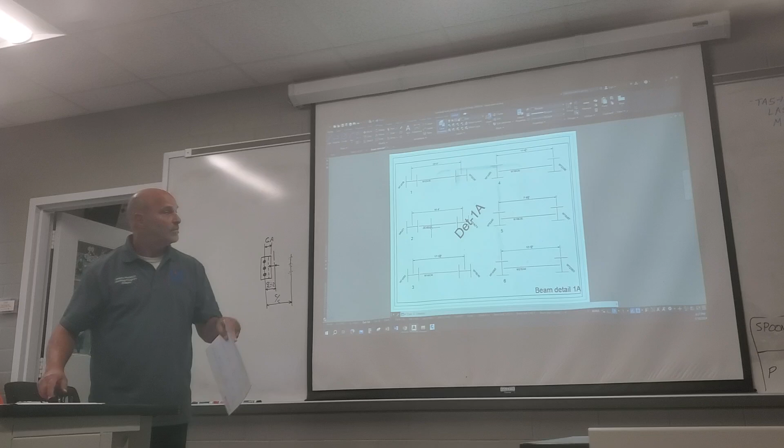I've shown you both ends of that beam. So on the previous assignment, we were just focused in on one end. All we could see and were worried about was that one beam and that one column right there. Now I'm showing you both ends. So this is what would be handed out to you as a drafter. This is what we would receive.

It's already gone through the design stage, where the facility says this is what we want for this kind of a unit. So different companies came in, they started engineering all the piping, all the other vessels and everything that needed to be out there. And they said, all right, civil structural people, we want all this off the ground. How can we make that work?

So then the civil structural designers went through and said, well, we've got this span right here. We need to support this. We'll put a column there. We'll put a pipe rack. We've got all this pipe coming from this location all the way over to here. We need to run all that pipe over there. Let's do a pipe rack. Sometimes it's, let's do a T-support, kind of like what we see outside these doors.

Does anybody take Highway 69 to Nederland, by the airport? That facility that's going up between Twin City Highway and 69, most areas are still in the civil structural phase. When you ride by and see all those square pillars, those aren't 4x4s. At a minimum, they're probably 16, 18-inch squares. Those are the pilings they're pushing down to get that compression, get that strength under whatever's gonna be out there. Sometimes it's vessels, but it's the civil structural that does that.

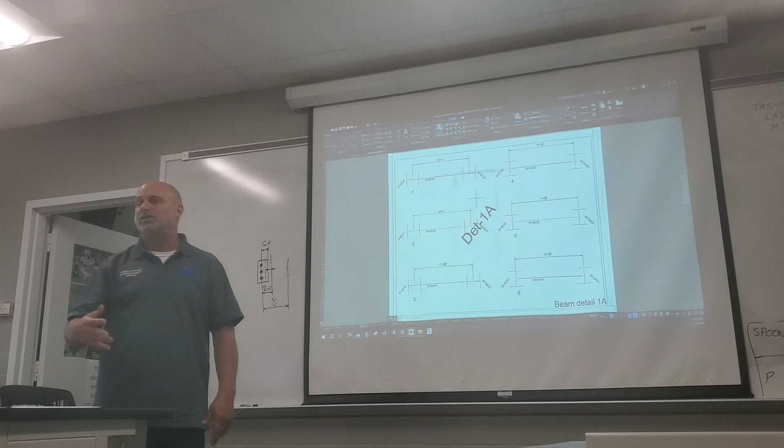So right now, they're mainly focusing on the below ground stuff. I don't go by there that much. Every few weeks or so, I'll ride by and notice a few changes. But I was going by there fairly frequently during the long semester, and I was noticing pretty regularly they were out there pushing those pilings down. I've seen them do stuff like that out at DD6. But that's all still civil structural.

Remember, civil structural starts at the top of the concrete and goes down. Anything steel above that concrete is still civil structural. All the rebar, all the footings underneath, that's all civil structural. All the beams and columns you're gonna see start going up pretty soon. Those areas with all those little squares look like somebody took a handful of square toothpicks and threw them in the ground. Those are gonna have something up there. They're supporting something. At some point, they're gonna start pouring slabs out there.

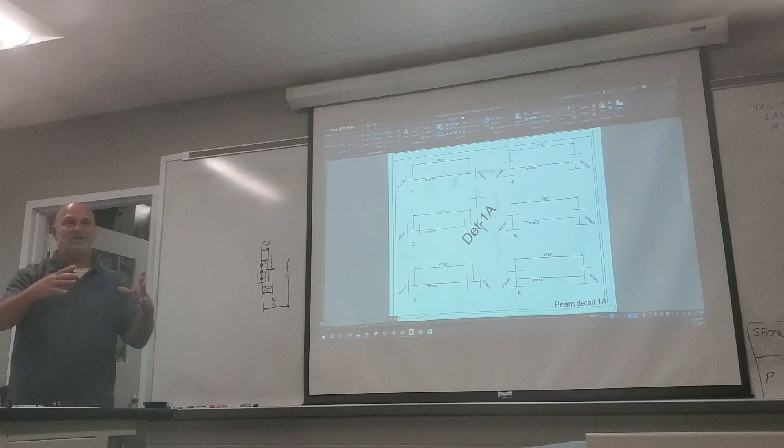As they pour slabs, you're gonna start seeing something similar to the footings you see in parking lots with light poles, those concrete piers that stick up. If you're riding by and see some of those sticking up close to the highway, don't get in a wreck. Take the feeder and stop over there. Don't pick up any hitchhikers in that area, remember?

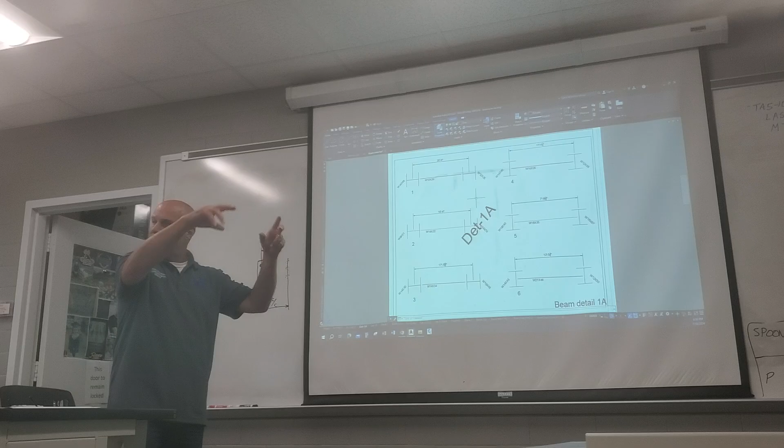You're gonna see anchor bolts sticking up out of a bunch of those. In the future, you might see a bunch of those little piers sticking up out of the ground with anchor bolts, usually 4. Then the next thing you'll see is all these columns set on there. Then the beams start to hang between them, the bracing starts to go between them. That's all the structural part once it gets up. So that's what it is.

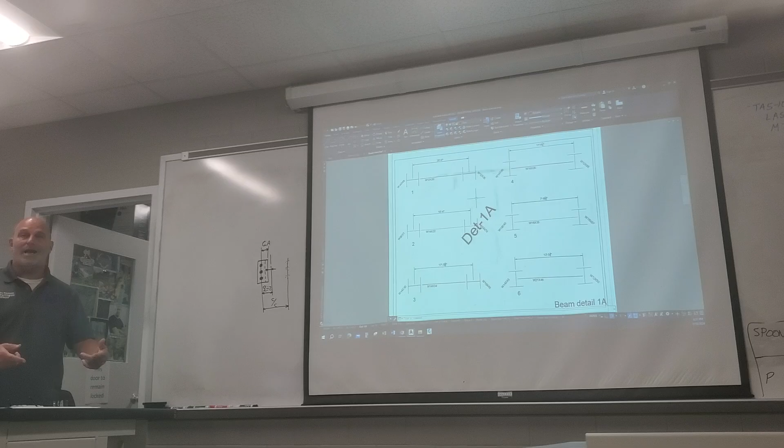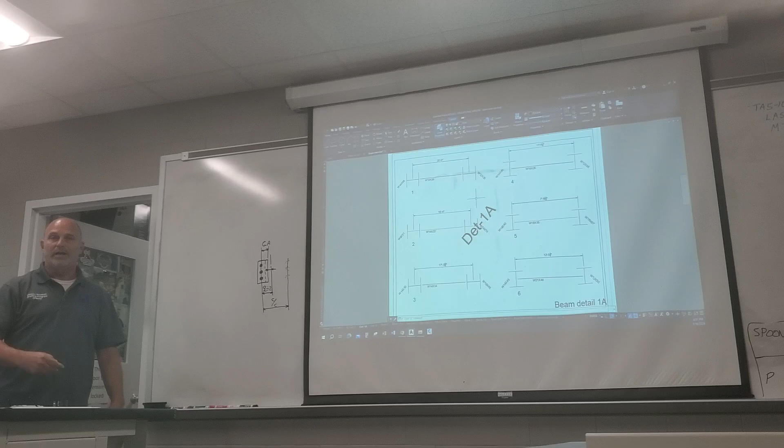Remember, this has to be 100% accurate before it gets out there. Not that place over there; they can probably drop it down on the ground and make changes because there's no actual facility, no unit, no processing being done out there yet, so there's no flammable gases. But on a normal basis as a structural drafter, you're working off this erection drawing saying we're gonna build this. I need to tell them what they need to build that. We need a column this size, this tall, with holes at this location.

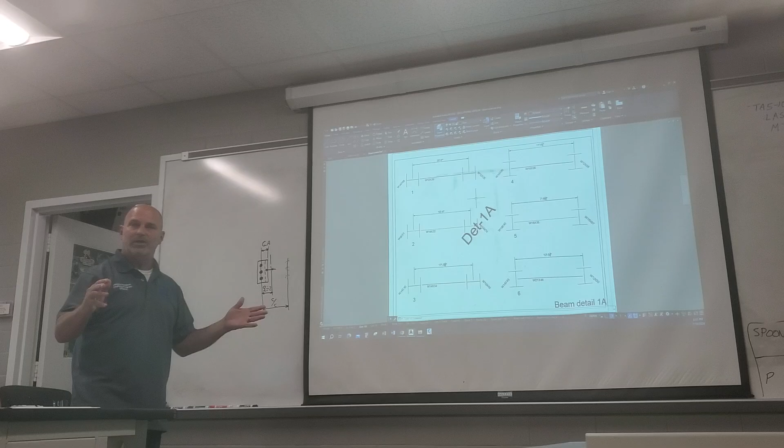An anchor bolt on the bottom with these holes, anchor plate at the bottom, base plate at the bottom, with holes in this pattern to match what's gonna be out there when we pour the concrete. And then we're gonna have this beam up here that needs to be this long with angles on each end, held back 1/4 of an inch, and it's gonna drop down in there, and those holes are gonna match. And they're gonna move on to the next one, into the next one, into the next one.

So we as a drafter look at it and say, well, what's happening? On this one right here, as we talked about before, we've got a center of column to center of column dimension, 20' 0. We say, well, let's focus on this end, just like we did on that last assignment. We say on this end, we've got a beam that's attaching to the column flange. Our beam is a W12 by 26. Our column is a W14 by 48.

But what else can we pull from that picture? Well, we know that this end is going to have about -7 inches. We know that our angle gauges in here, our center to center is going to be either 3.5 or 5.5. We know that possibly by now, after doing that first assignment, you've seen that the W12s are on the 3 rows. So you're going to start to learn stuff like that. I can tell you how to judge it, but right now, look it up on the chart.

On this other end over here, we're attaching to a flange over here. So our minus dimension on this end, our column is a W12, is going to be about -6 inches. So this as a drafter would be what we would be working off of to detail that member right there. To take that piece right there and say, here's how long it needs to be. Put the angles on this end. Here's how many rows. So that is what you're going to be doing on this one, is filling in that last sheet. I need to go get some copies of that too.

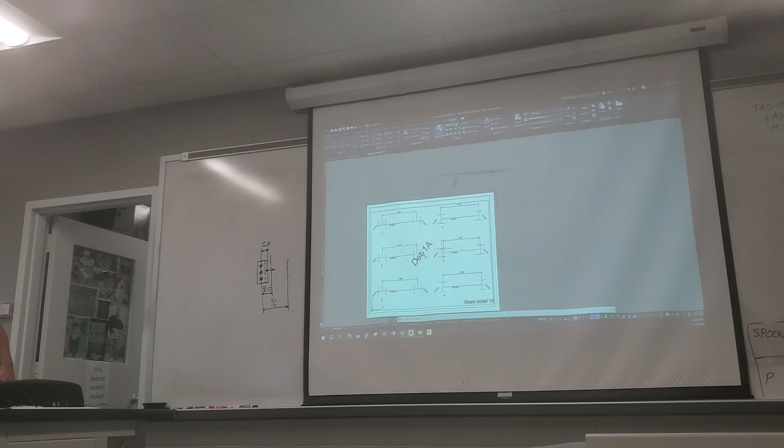So on your first sheet, on the left-hand side, you've got 3 beams attaching the column flanges on each end. On the right-hand side, numbers 4 through 6, you've got 3 beam details that you're doing. Those are attaching to column webs on each end. So on these first 3, about -7 for this one, -6 for this one, -4 over here, -7 over there, -7, -8. We can guesstimate on that.

And right now, like I said, it's a matter of just you looking at it saying, before I even let somebody else check it, I want to make sure that I'm at least kind of going, or maybe you're just jetting out of here and not even thinking about it till Saturday.

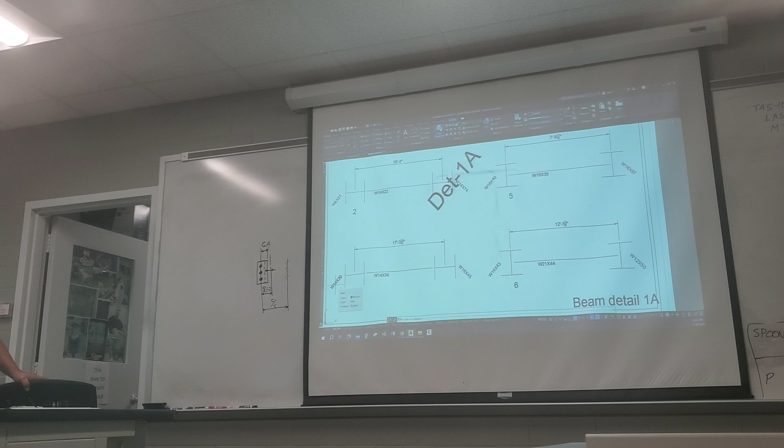All right, here's a quick check for it. If I look back at this piece right here, number 3, and on this end over here, I see -1/4 inch, 1/8 of an inch, 3/16 of an inch. I know something's wrong because that was attaching to the flange. It's going to be about -7. About -8 on that right end. Over here on these, we know that our minus dimension for all of these is going to be in the 1/8 to 3/16, 5/16 possible. I don't think we'll get that heavy though. But it's going to be right around 1/8 to 3/16 as a norm.

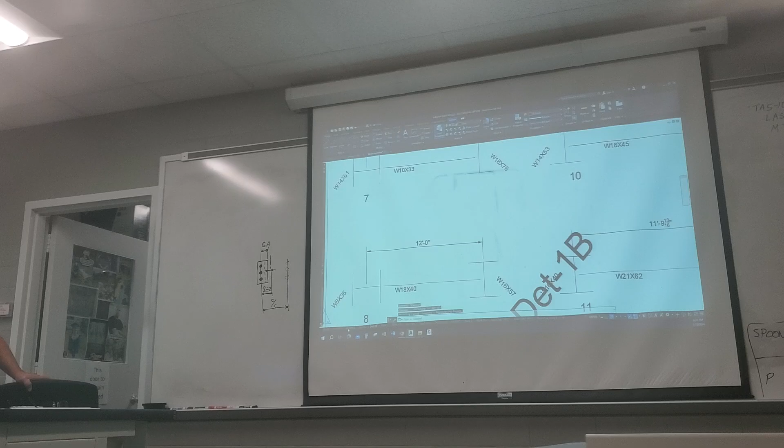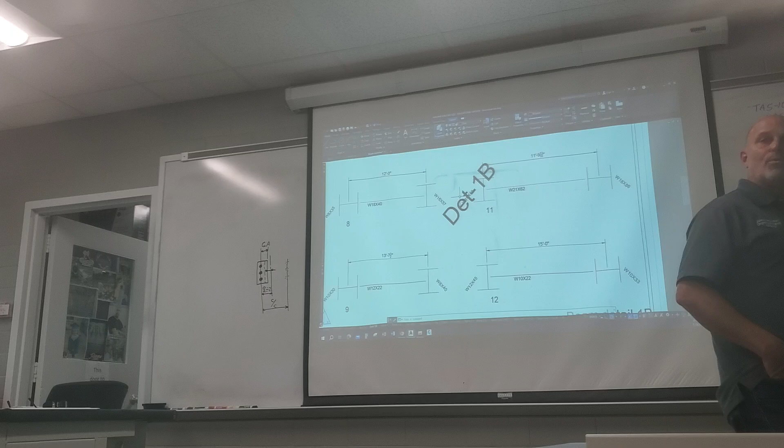The second page that I gave you, beam detail 1B. On this one, end to end, you've got a column flange on one end, a column web on the other end. Once again, when we're calculating those ends though, we're calculating just based on that end. Then we will look at the other one. What happens on that left end over there has nothing to do with what happens on this right hand end.

We're going to calculate those 5 items just like we did on that first assignment for one end, and we're going to push that out of our head. You'll learn to carry some stuff forward. But for right now, you calculate one end, you push it out. Then you look at the other end and say, okay, I've got a beam that is this size attaching to a column of this size. A column web or a column flange. You've only got 2 choices there.

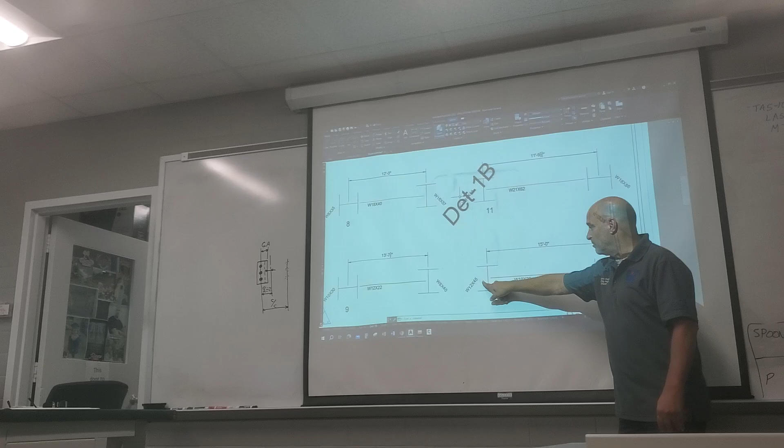So on this one, it's opposite on each end. So on one end, it's going to be minus about half of what that size is. This one's going to be about -9 because we're attaching to the flange of a W18. This one's going to be about -5 because we're attaching to the flange of a W10. This end over here, all we know is it's going to be about the 1/8 to whatever range.

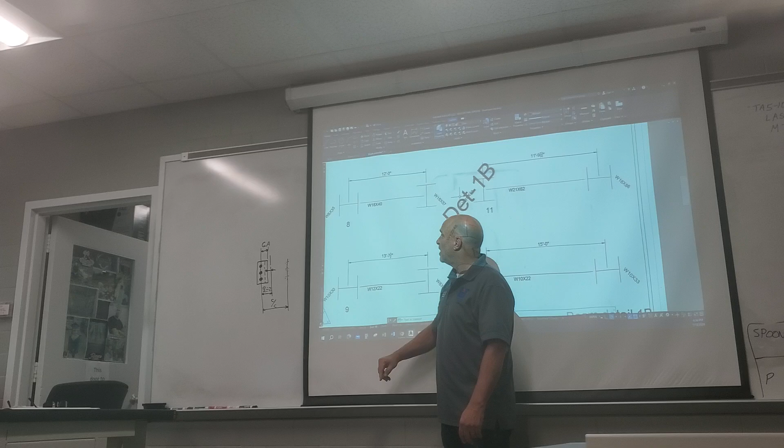Over here, 1/8 to whatever range. Over here, 1/8 to whatever. Over here, about -5, about -4. So what you're doing is, and like I said, I'm gonna go get some more copies of that third sheet here in a minute. I forgot I need to print some more of those out.

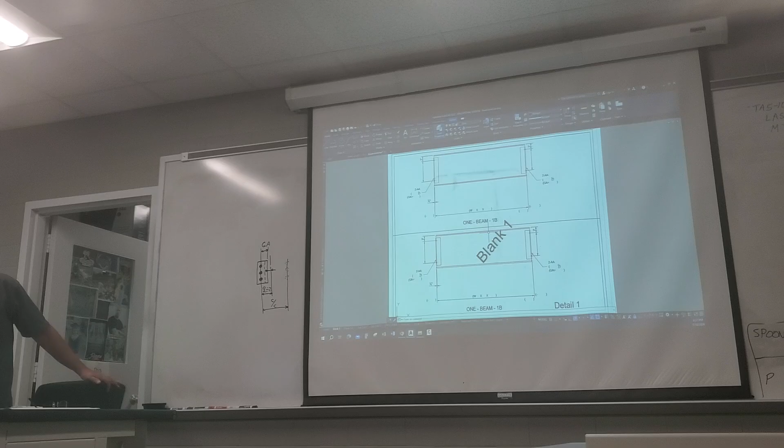So what you've got here is a total of 12 pictures between those first 2 handout pages. You're gonna need 6 of these sheets as a minimum. So all I have in your packet right there is gonna be the one, so I will go get some more of these in a minute. But once again, you're gonna be filling out each end, just like you did before. The number of rows. The only thing that you don't have is a measurement on this one. I just wanted to make sure y'all remember where that came from.

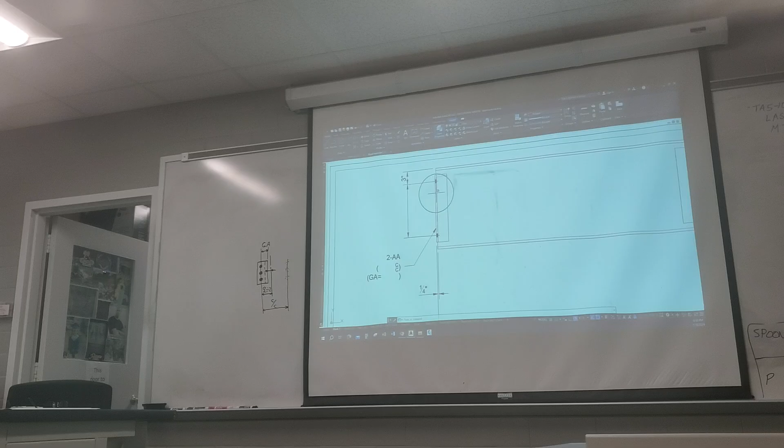So you've got your distance between rows. So if your beam has 2 rows, you're just gonna write 3 inches right there. If your beam has 3 rows, you're gonna say, well, there's 1, there's 2, let me draw a line, 3 inches right here for that measurement, 3 inches for that measurement. If yours has 5 rows, there's 1, there's 2, so you're gonna draw a line for number 3, line for number 4, line for number 5, you're gonna draw those lines out and get 3 inches between each one.

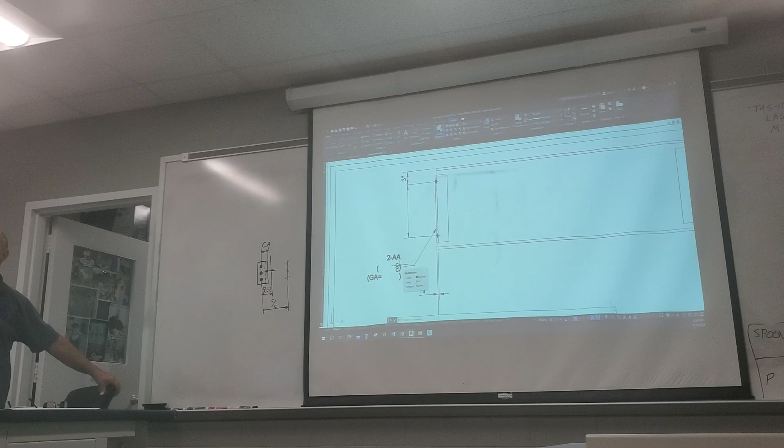Mr. P, this one's a W6 and it's 6 1/8 deep, and this one's a W18 by 145, and it's really 18.5 inches deep, but the pictures are the same. It's a sketch. If you got a structural job, you could actually make you something like this, a picture that you could print out and just write your stuff on just to get you started on what you're doing. It doesn't matter how tall that piece is and how many rows you could physically put in between those 2 little lines that I drew. That number is coming off that chart.

So here's what's new. The new part, now that you're looking at it on its own page, its own detail. Right over here, don't worry about that 2-AA. We'll get to that later on. We're not adding that much new today. Just ignore that where it says that. Here's your center to center. Here's your gauge. You're gonna be filling those out. Your number of rows and your minus dimension, just like before. You're gonna be doing it on each end.

The only difference on each end is that measurement right there. Then, this measurement right here, this parentheses on the bottom. If you look back at your sheet, the first sheet of this packet, like I said, I'm gonna print quite a few of those, so if y'all need extras, if you wanna use the one I gave you to make up some, use it as a note sheet, you're more than welcome to. I'll print more if I need to.

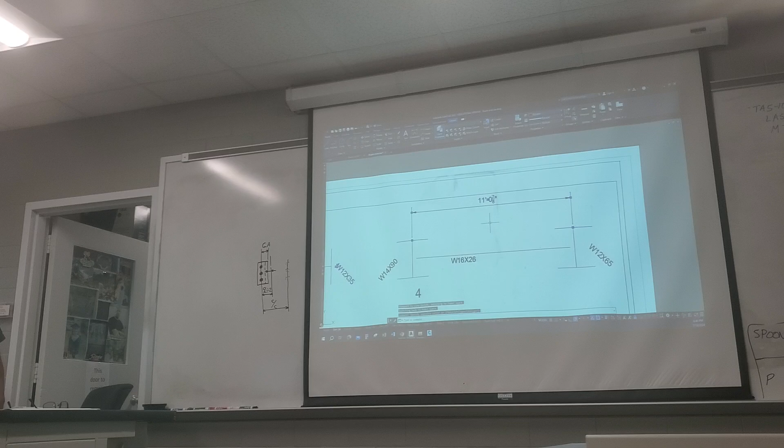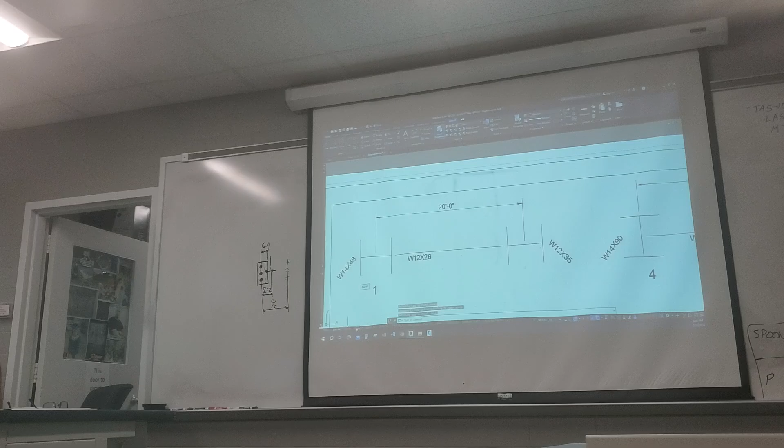So that 20-foot measurement right here on number 1. Here's your number for it right here. That 20-foot dimension is going to go in that area right there. That is your overall dimension. If the parentheses are too small, that's okay. Just write it underneath it or something. Don't stress over something like that. That is where your overall measurement goes, your overall measurement being the center to center on your columns. Everybody got that?

On this dimension right here, you will see that that measurement from end to end represents that finished product when it leaves the fabrication shop, gets loaded onto a truck, driven out to some facility, some refinery, and brought in there, hooked onto with the crane and lifted up into position. So whether it's attaching to the flange or the web of that column, it doesn't matter. As long as we minus the right numbers, that thing should slide right down in between there. So we're gonna take this measurement right here, our overall dimension, and we're gonna subtract that number, and we're gonna subtract that number.

Coincidence that that number has a minus in it? Subtraction in it, in the parentheses, called a minus dimension. So that's what we do. We take that overall, and we say this finished product is gonna leave and just go perfectly into place. We subtracted on each end. There's how much we subtracted.

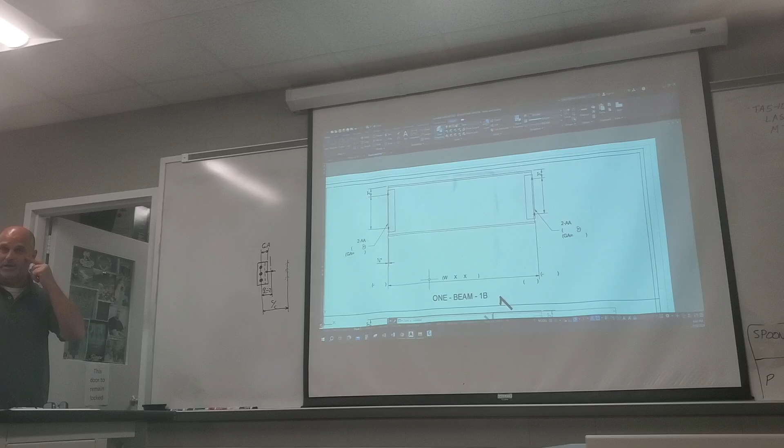They say, well, we're ExxonMobil, why don't you build this facility for us? Sure, we'll build it for you. Another company says, hey, they got that nice new facility y'all built for them. Why don't you build it for us over here? Sure. Where you got room? What size area do you have for us? That's what's gonna dictate how everything is set up.

So even though those two are built right across the road from each other doing the exact same product, literally trucks pulling up and saying, which one of y'all needs a truck? I'll turn left or right, it doesn't matter. Doing the exact same product is gonna be a whole different layout because it's all based on where's the tank gonna be for this project, where's this vessel, this piece of equipment. Now we got a pipe between them.

Now the structural people have to come back and say, okay, this is what you're doing on this project. We need to support this run because it's 20 feet. Over on that last project, it went 6 feet this way and it turned 90 because it had to go this direction, not that way. So as a structural drafter, we have to look at each individual one. And then we have to look at each end of that one and say, what do I do here? What do I do here?

And we're gonna write those minus dimensions down. Then we're gonna do the math equation. We're gonna say overall center dimension minus this equals, and we're gonna put that number right there where my cursor is, in front of those parentheses. That's referred to as a shipping length. So when we're putting all this stuff on a truck, we need to know how long of a trailer we need. That's why it's referred to, I think, as a shipping length. That's how big that unit is gonna be when it leaves to go to the next step, when it is fully fabricated.

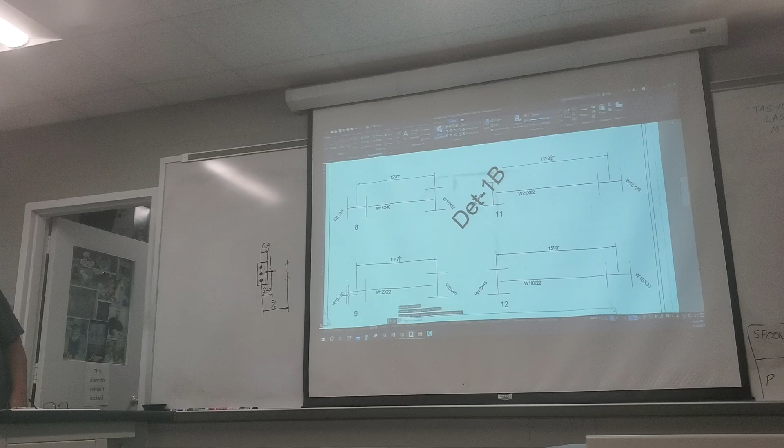Inside the parentheses right here, W something. Remember, we're talking about the beam. So if I go back to that sheet, first sheet, our beam is a W12 by 26. So after we tell them the shipping length, the cut length, the end-to-end measurement for that piece once it leaves the fabrication shop, we're gonna tell them this piece is a W12 by 26 by, and we have to tell them how long to cut that off.

Because at some point, that beam is probably gonna be made in a whole different shop and warehouse than what that W shape would be made in. Those angles are gonna be made over here in your regular, pretty much standard fabrication shops. Most of them have one big area where they do nothing but those W shapes. The beams, the channels, stuff like that. They do the big heavy members. And then lots of times you have another shop over there that does nothing but plates. Maybe half of it does plates. Another half of it does angles.

So whenever that person goes to make this beam, he's gonna pull up this drawing that we as drafters, we as detailers create. And they're gonna say, all right, I'm making this one right here. Go get me a W12 by 26 and cut it this long. And then bring it down here. And if we had other things attaching to it, just like we saw out there, that handrail and stuff, maybe we've got plates on our beam. We're gonna detail this piece out. Right now, we're just talking about the ends of it.

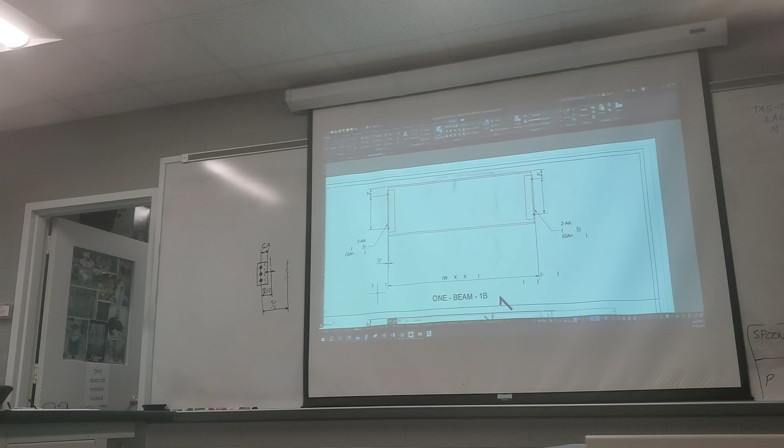So what dimension goes at the end? The shipping length or the actual? No, I'm gonna tell you in just a second how we find that. So we're gonna tell the person over in this facility that is working on the W shapes, go get this size member and cut it this length. That length we know is gonna be held back 1/4 of an inch right here.

So W12 by, so we started out, I'm gonna run through the formulas again. We had our overall minus our minus dimension, minus our minus dimension, gave us our shipping length right here, and then we're gonna tell them information about that W shape, W12 by 26 by. We've gotta tell them a length on that. So once I do this number right here, minus this, and I get this number right here, my shipping length, I can say, well, minus 1/4 on this end, minus 1/4 on this end, that's my length.

So it's all formulas when you look at it. You don't have to be a math person, you don't have to like to do algebra or anything like that. But if you just write it down and say, oh, there's not a lot of A's and B's and X's and stuff like that, but that's a formula. Web thickness divided by 2, that's a formula. So don't be scared of the math. Don't be worried about the math in structural steel. It is what it is.

As drafters, at some point or another in all industries, it comes down to a measurement. Just because we do schematics in E&I, we say, here's a nice picture, at some point or another, somebody's gonna have to calculate that conduit, all that wire that's going through there, all the little fittings for that instrumentation stuff. So at some point, measurements are involved in all forms of drafting.

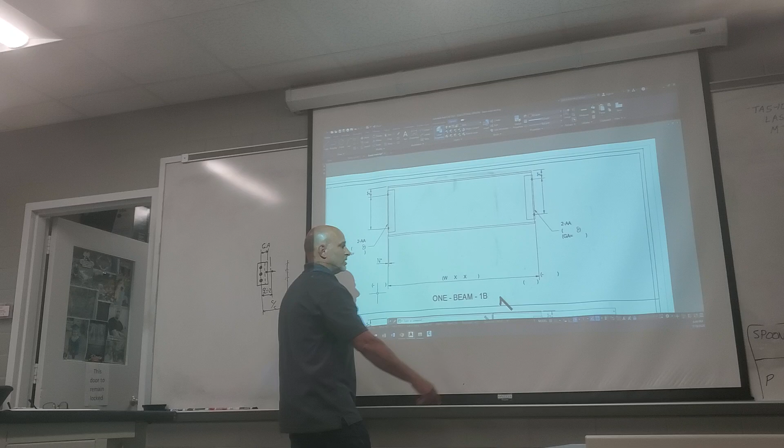Here's the twist. So this number minus our minus dimensions gave us our shipping length. That's the end to end of the angles and everything. And we said that to make this, we already told them some info about the angles. For this, we need a W12 by 26 by our length. We don't show 1/16 of an inch measurements in this box right here. Everybody see that? That value right there, we do not show in 1/16 of an inch increments.

How do we eliminate that? We don't show that dimension. That dimension could be 1/4 of an inch, it could be 5/16. It doesn't matter. When we go to write this length down here, we say that number minus those 2 numbers equals this, minus 1/4, minus 1/4. If it gives us an answer that's in 1/16 of an inch, we're just gonna drop a 1/16 off of it, because we're not gonna show that 5/16 anyway. It's just another rule. Lots of rules in drafting.

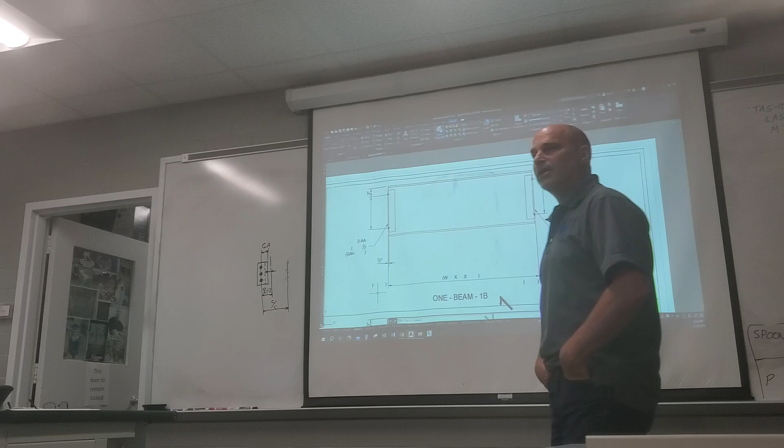A lot of them can be answered just by looking at this stuff that I had up on the desk the other day. Well, Mr. P, why didn't you put it up on the desk? Well, I want y'all to understand that it's over there. If y'all want it, if y'all need it, go grab it. Bring it to your desk if you need to.

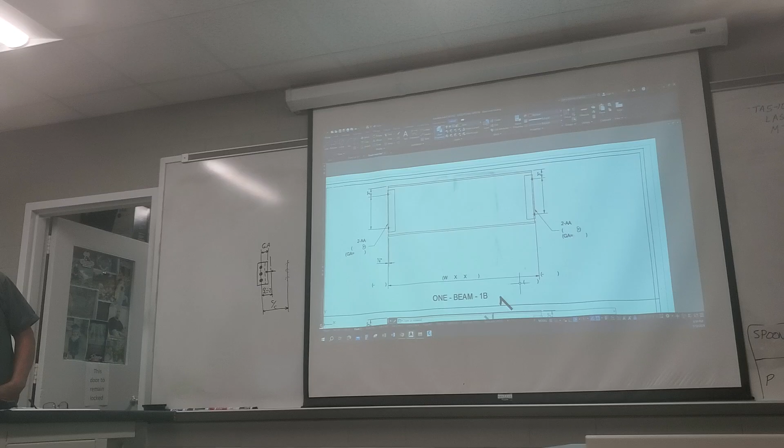So that one in the parentheses, you're subtracting a 1/4 inch from it? Which one? This one right here in the parentheses? Yes. We're subtracting really 1/2 inch. Well, a 1/4 here and a 1/4 here, yes. Every time? Yep. That's that extra cost of having to pay to have those 100% square cut. We're not gonna pay that. We're gonna do 10 beams for the cost of one, and we're gonna do it quicker than that machine's gonna square cut that one. Probably not quicker, but we're not spending the money on the machine.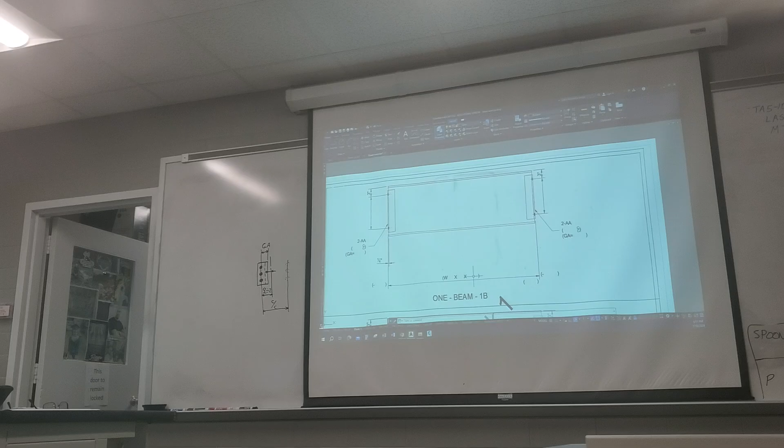So the shipping length minus 1/2 inch. Yep. And then if it's in 16ths, knock another one off. Why? Not sure, just a rule. I don't know why. Knock the 16th off, if it's in 16ths. So when I do the math, this one's okay being in 16ths, but when I subtract a 1/2 inch, so if I get a number right here, 10 foot 11 and 9/16, I'm not gonna tell them to cut that member 10 foot 11 and 1/16. I'm gonna tell them 10 foot 11. I'm gonna knock a 16th off. It's just a rule.

So that's the only step that you're doing differently. You're carrying that value from that other sheet over to here, your overall dimension from end to end. And then you're doing the math, you're saying this minus those, and you're writing that value right here. And then you're looking at that other sheet saying what size is it? You're writing that right there.

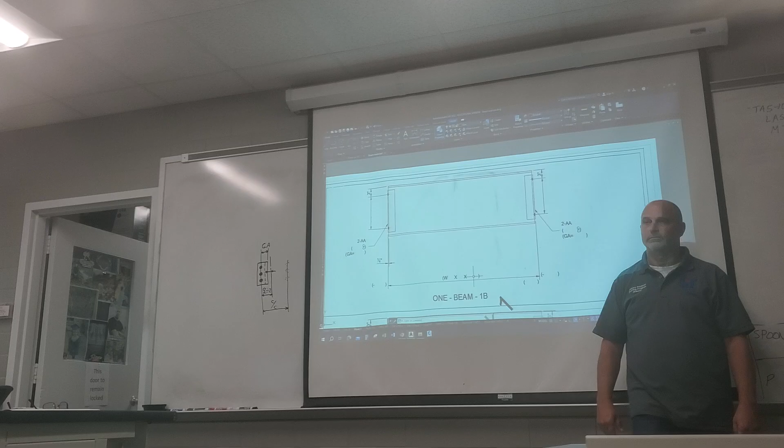So, I got a question, you kind of confused me there. So say it was 11, or whatever you said, and 9/16. So you're knocking it back down to... I took the half off for the quarters. I took the half off because of the quarter and quarter on each end. Okay. Which left me 11 foot something and 1/16. Oh, okay. I was thinking the other way around.

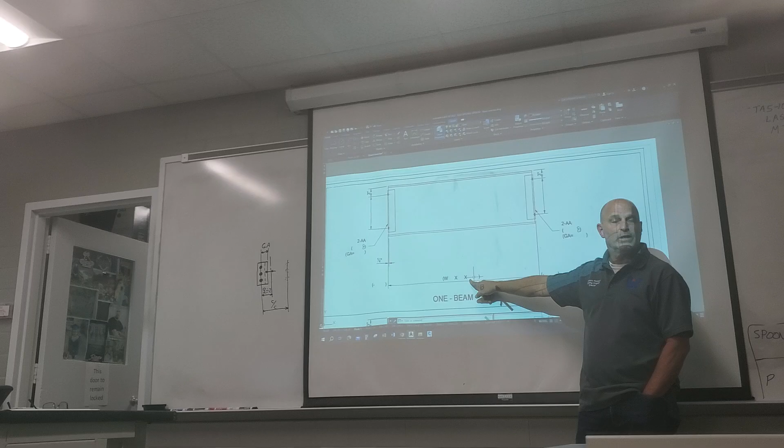Now, from here to here, we're taking this number minus a quarter to get this value. And the only rule really for that is if it's in a 16th, knock another one off. If your answer right there is something in 13/16, you're gonna put something in 3/4. You'll knock a 16th off. Okay, yeah, that's what I was getting at.

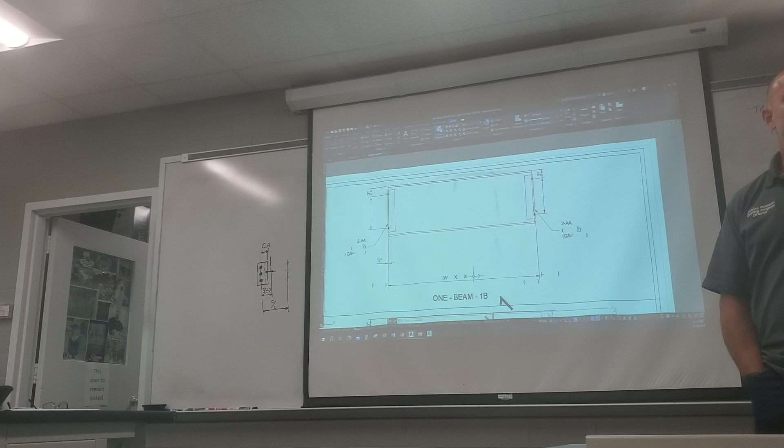Cause I thought you went from 9/16 all the way down because of that rule. No, I went because of the minus quarter. Okay. Yeah, no, it wasn't just automatically knocking it off to an even inch. Okay. So remember that, y'all catch that, you're knocking a 16th off. So if it's 1/16, 3/16, 13/16, 9/16, just knock 1/16 off.

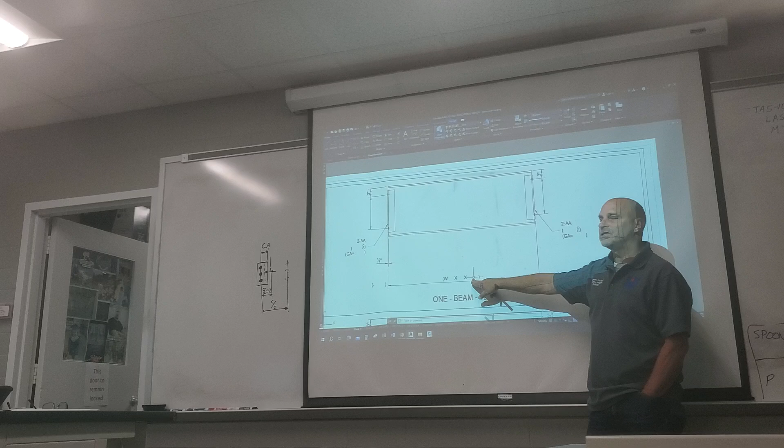If you get an answer of something in 7/16 right here, you're gonna write 3/8. You're gonna knock 1/16 off of this answer. Good question about that one. So for all of those dimensions, we're just going off of number 1? For this detail right here.

Okay. So what I want y'all to do is tell me which one it is right here after the B. That's where you're gonna put what number it is, number 1, number 2, number 3, 4, 5, all the way up to number 12. And we do that for both of those? That'll be number 1, that will be number 2 on the bottom, then you have another sheet, number 3, number 4. Don't forget to put your names on your sheets, I'm gonna print some more.

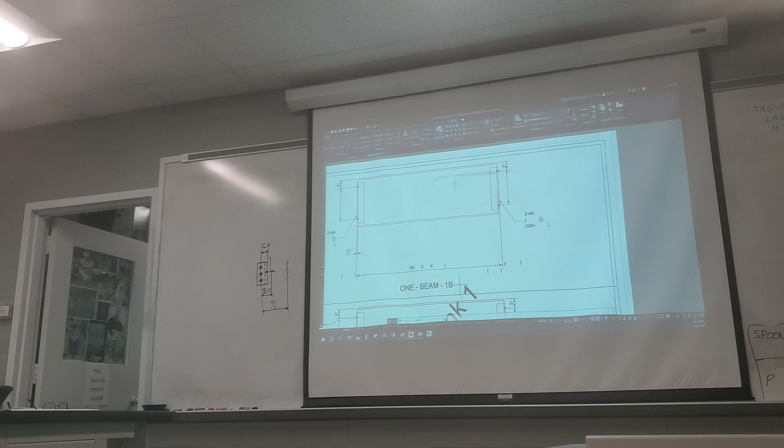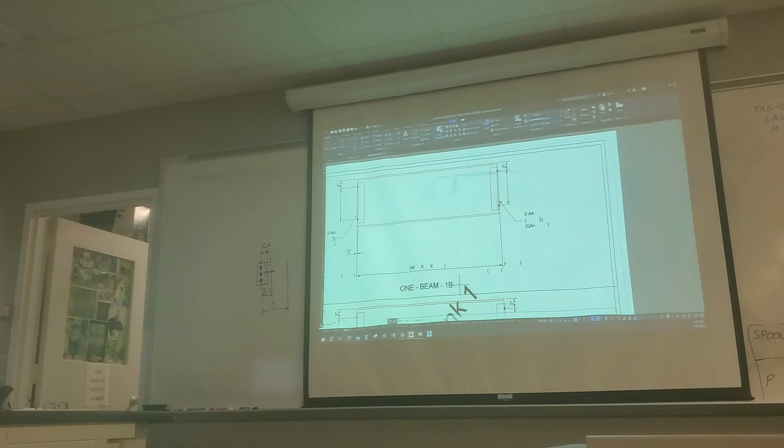So those of you that were taking notes and writing that down, that's what it takes, trust me, unless you have a photographic memory, to learn everything for structural steel, because there are so many. You hit this thing where you say, okay, that's a standard, yes. And then right after, it's like, nope. That's a standard, except. So a lot of these have an unless or except after it. So just when you think, all right, I'm chugging along, bam, there's another train track that cuts off. Which way's the switch go?

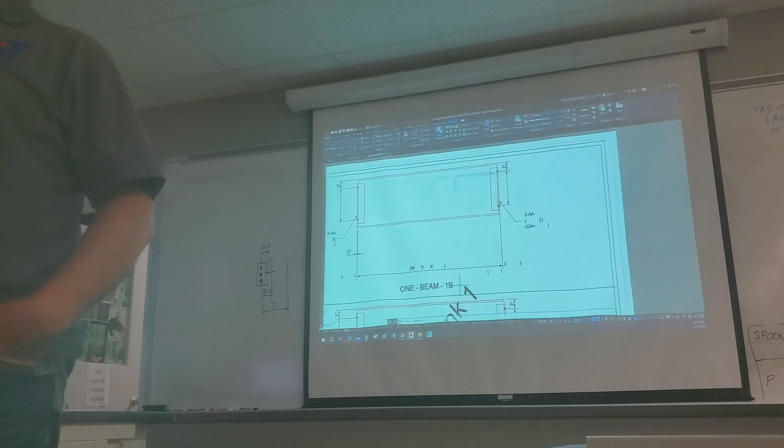So we aren't writing anything on the first 2 sheets? Correct. I don't need the first 2 sheets back. That's just where you pull your info from. So you're gonna write each one of those numbers. The numbers are 1 through 12 on those problems. That's where you'll write that, right here. So the only new difference is you're gonna pull that overall from those first 2 sheets and write it here.

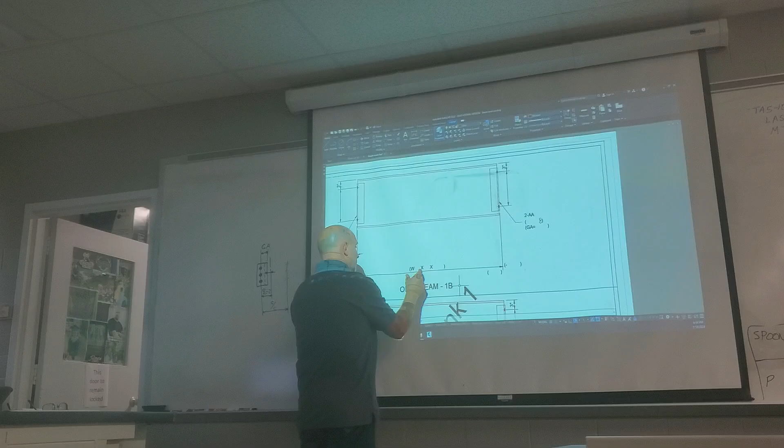So remember, if you just think of it as formulas, it's just like when you drive here, I go to this point, then I go here, then here. Same thing with this. You pull this number over, then you go here, minus this, and you put it there. Then you go minus this, and put it there. Except if it's in a 16th of an inch increment, knock one off.

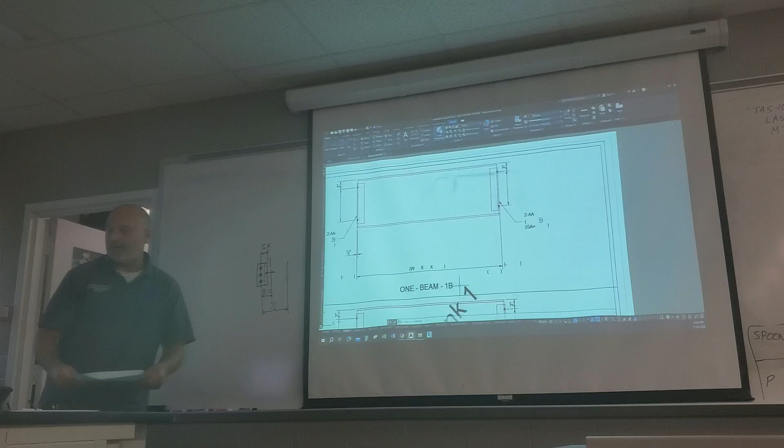All right, I'm gonna go get some more copies of that second page. And see, on the 4th page that I gave you, I forgot about this one. This one right here shows you exactly where you will be filling information in. Each one of those asterisks represents something that you will fill in. Each one, you should have somewhere either in your brain or in your notes saying what goes there.

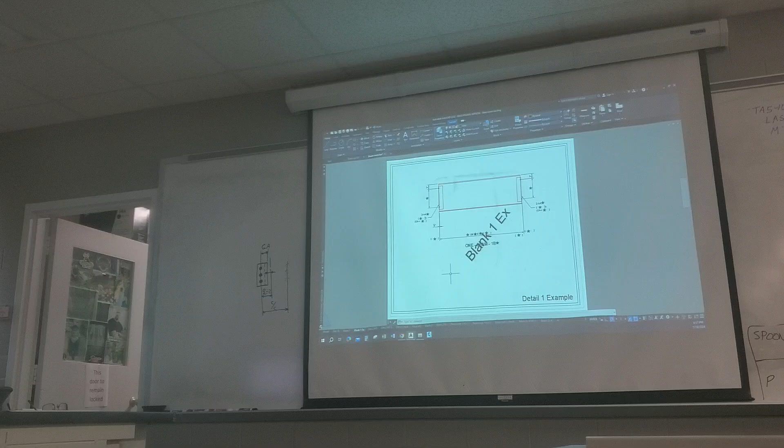Do you have any copies of the past homework assignment? Yes. Can I have one of those books? Yes, I've got some up there. When I get back over there, let's go grab those for copies. So head on up there. So any questions before I go get copies? Go ahead.